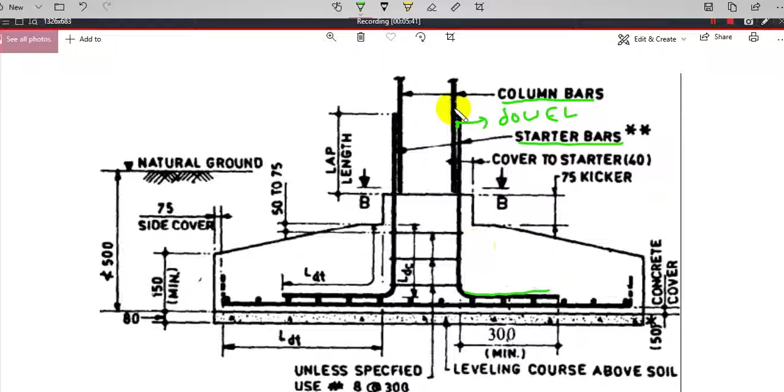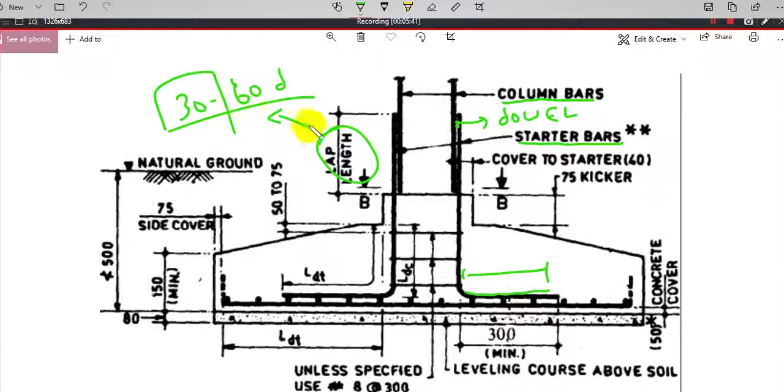First, you will be having a column bar which stays right inside of the dowel bar, or they call it the starter bar. That's used to attach the column bar right into the footing, a sort of attachment from column to footing. The length of the dowel bar could be either 300, and the height of the dowel bar comes to be the development lap length, that could be either 30 to 60 times the diameter. In this video, I'll be taking it up as 30D. There's nothing more to explain, and you can see that the column bar stays right inside of the dowel bar. Alright, so let's get into here.

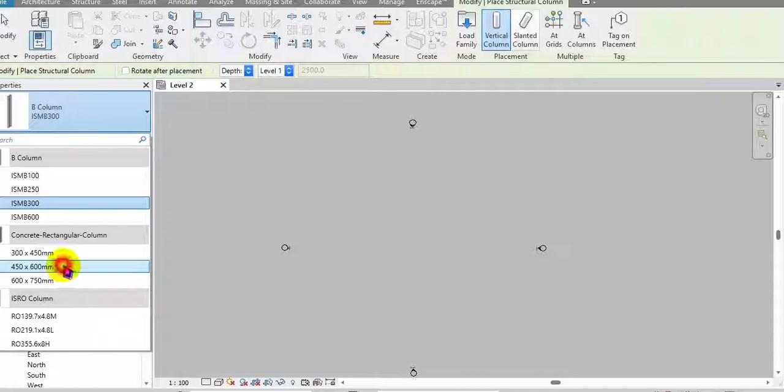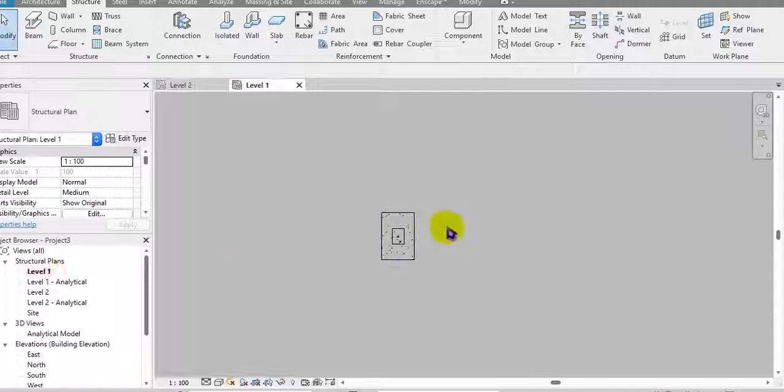So right now the foundation will not be visible in level 2, so let's get into level 1 to see that. Alright, so let's first fix up the longitudinal bar and the transverse bar right into this footing.

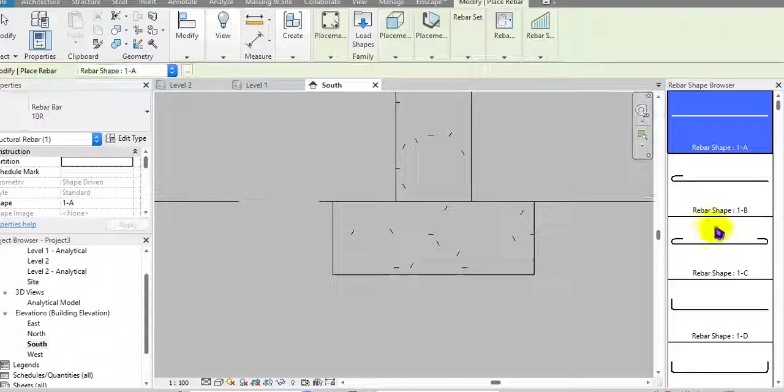So get into south elevation. We'll be placing a longitudinal bar right into the footing here, so rebar. Okay, I placed it right here, and I like to consider the spacing to be like 150, in one direction. And now I'm in south elevation, so you can see the bar goes in this direction longitudinally.

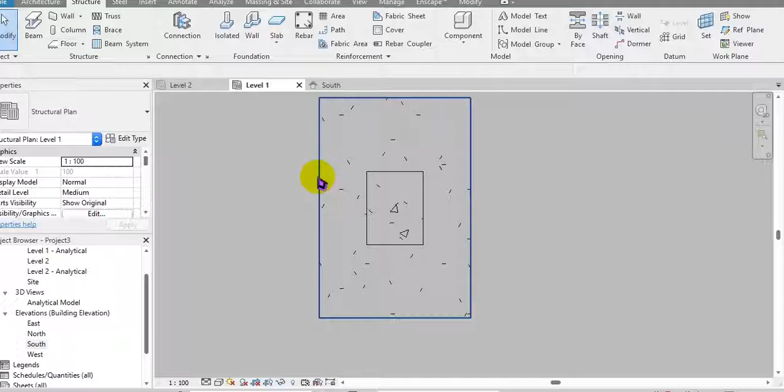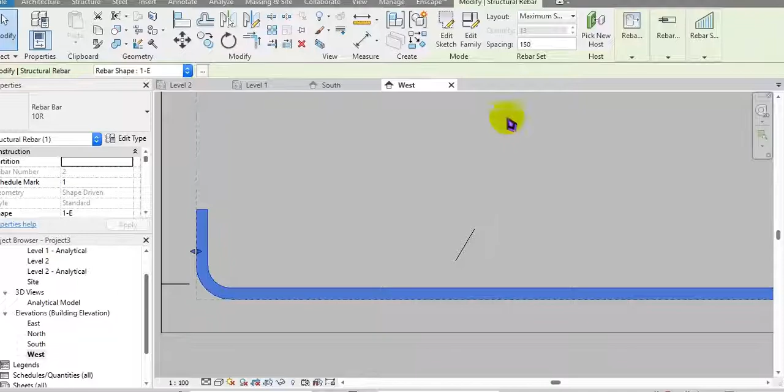So in order to place a rebar transverse, get into west elevation or east elevation, do the same thing, rebar. Okay, I'll pick up the rebar set, change up the number, it goes 150. So that's all about the case for placing up the rebar right into the basement here.

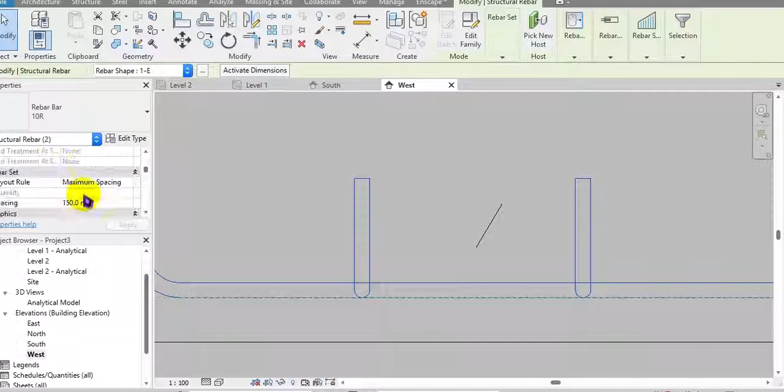So now let's do one more thing, I will show you a simple mistake that everyone will make. Right now, this point, I should just be selecting the rebar, and I like to, alright, if I get into the 3D view. Alright, this is the situation right here.

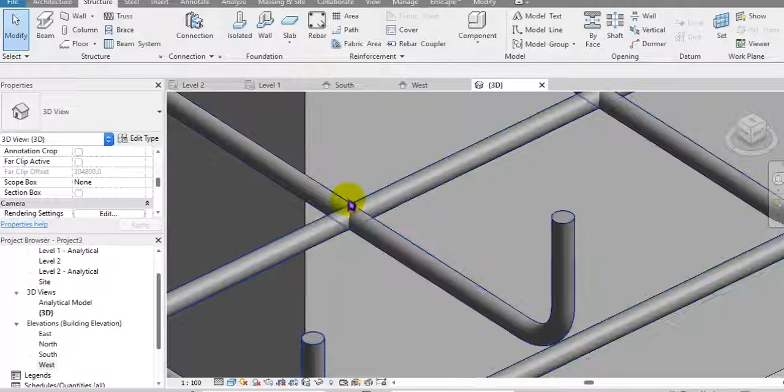As the first point of error, the mistake you can see here is two bars are intersecting right at the same point here. And also, if I turn them into a shaded view, you can see that the bar is again intersecting, overlapping right at this point.

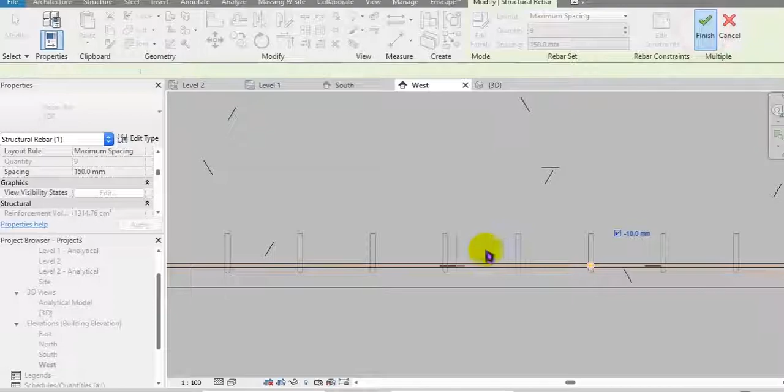So in order to fix both of these issues, let's make use of constraint. I'll select the bar right here. I can use the edit constraint options, and I like to shift the bottom bar right at 10 millimeter upwards as Y. You can see that the diameter of the bar is 10. So right now, if I get into 3D view, there's no sort of overlapping right there, but this situation has not been resolved.

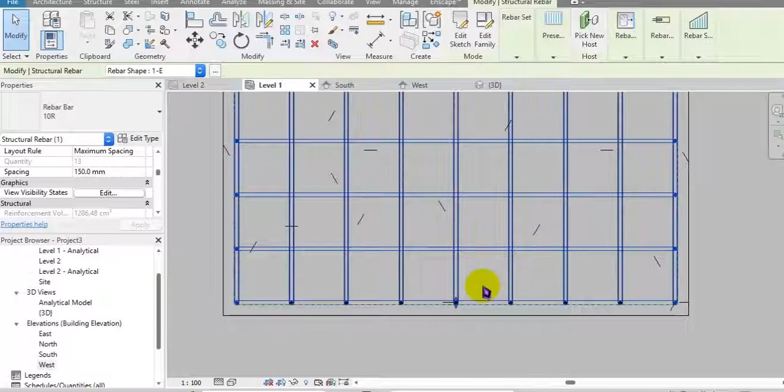In order to solve that situation, I can get into wireframe view. You can see that this part, you could like to shift the first rebar right 10 millimeter away from the face, so -10. And also the same situation right here, picking up this bar again -10. So that's it.

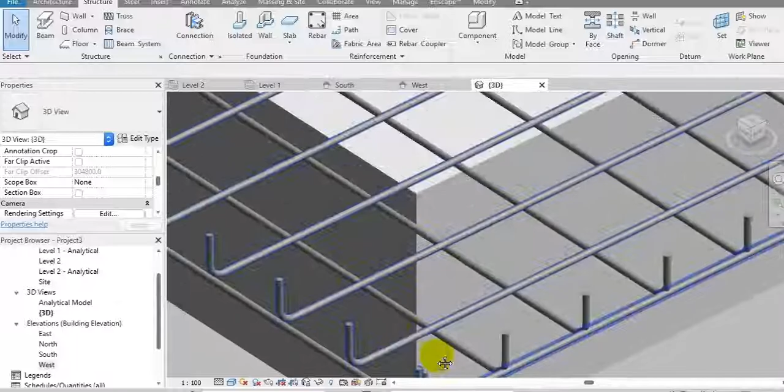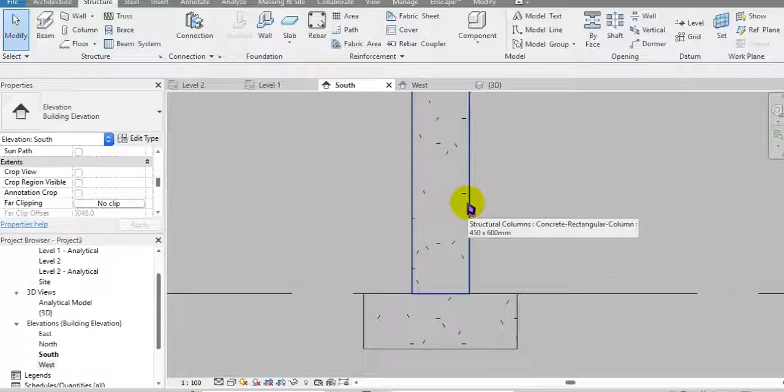Alright, cool, so that's all about the rebar provided right here. Also, let's try to provide the rebar, the column bar right there. Alright, that's all about the rebar provided in footing. Now let's provide the rebar right in the, where is it?

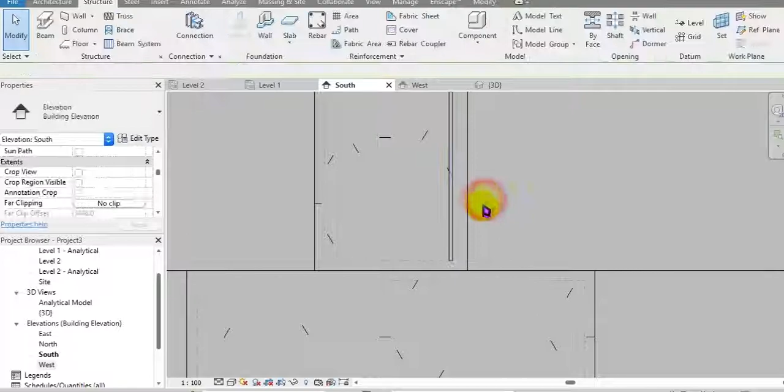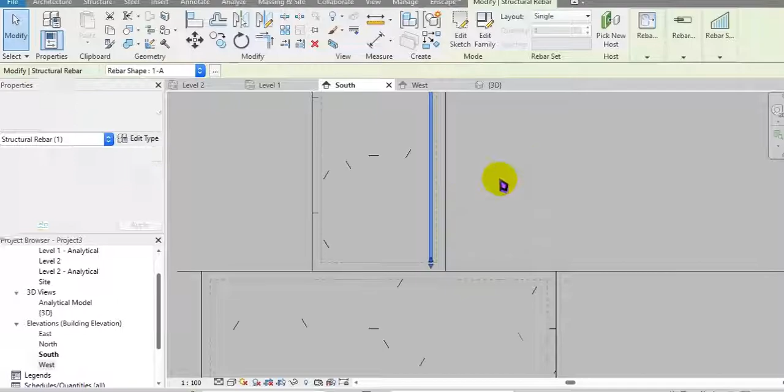Now let's place the dowel bar. Later, let's try to add something on the column bar and fix up the spacing there. Alright, in order to fix up the dowel bar, let's select the rebar now, and I can create a similar bar. And well, parallel, okay, that's okay.

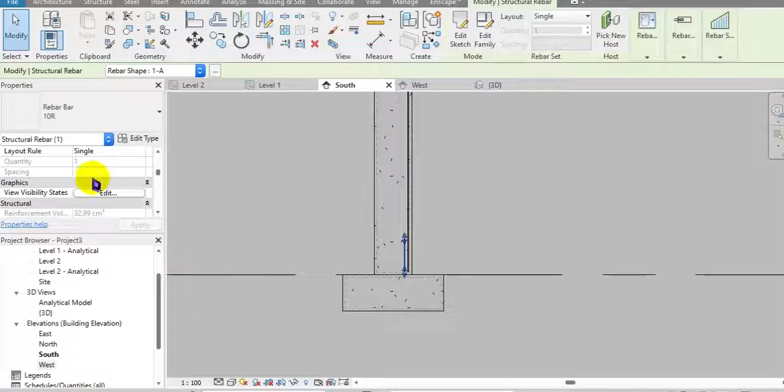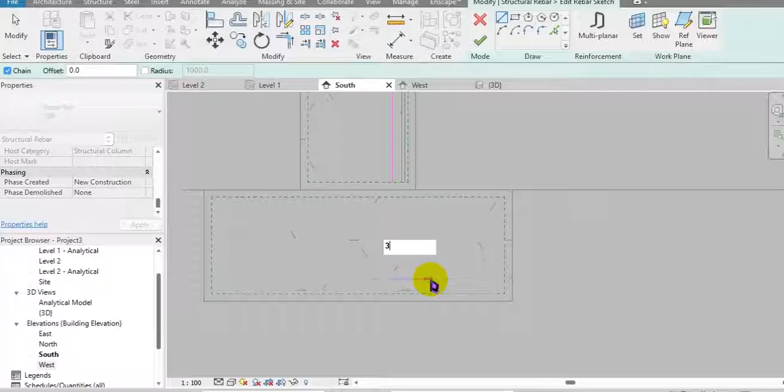Now I don't need this much height, and I'll change up the length. Alright, then I like to edit the sketch. You should see that the bar stays at 300 millimeter right inside of this column. So let's try to draw that. Okay, right from here that goes 300. That's it, kind of trim.

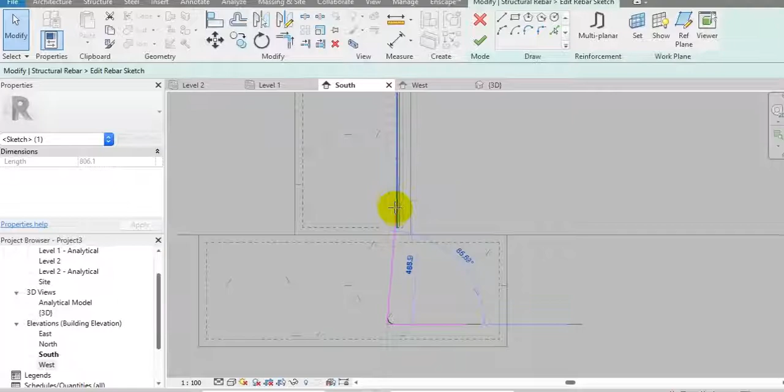First and second. About the height of the rebar, it's 30 times the diameter, so that will be 300. Well, 300 is measured from the face, so let's try to keep it right onto the face. Then let's apply a formula. I'll just add 300 with 360. That comes to be 660. That's it.

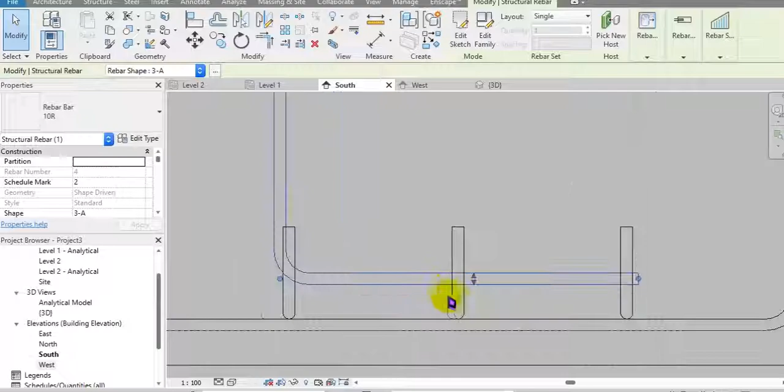Now let's fix up the distance from each face. Okay, let's get into wireframe. So we got 10 millimeter here and 10 millimeter here. So the total constraint provided right into this will be -20. Alright, that's it. Now what about the face? Okay, and to the face you can see that the column bar stays right inside of the dowel bar, so the cover will be the dowel bar, so that will be right away 0. It stays inside. Alright, that's cool.

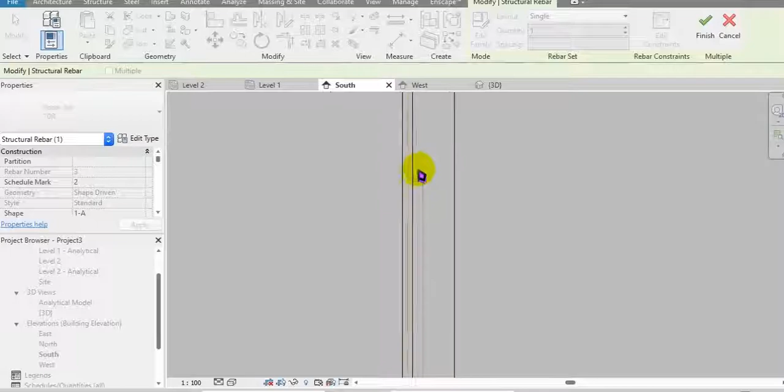Now what about here? Edit the constraint. That'll be -10, okay, as the diameter of this dowel bar is 10 millimeter. Alright, so fixing the dowel bar right into the column bar is also clear.

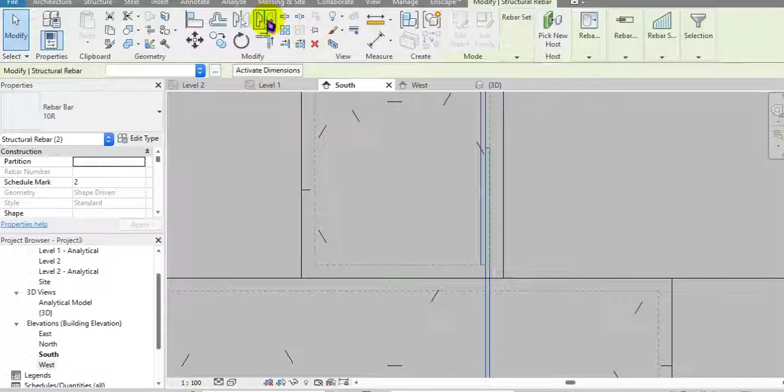That's it. Now let's try to change up the number. Fix number 3. What about here? Fix number 3. Alright, then mirror. Oh wow, that's it, I'm getting the 3D view. What, can you see anything? Okay, getting the wireframe. Alright, that looks so cool.

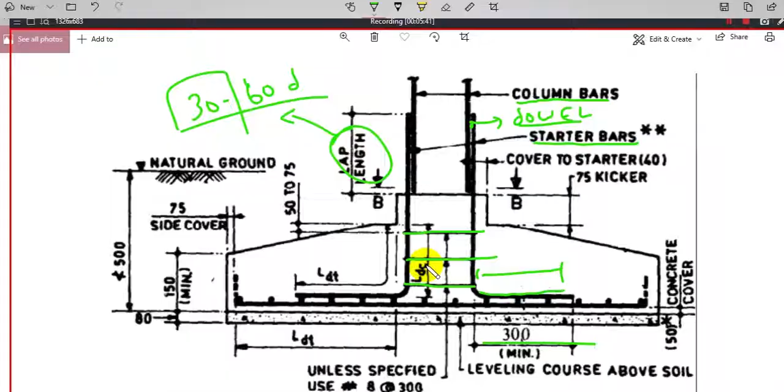Now, next thing, anything missing? Yeah, we will be having a sort of tie or stirrups right there. I'm gonna provide a spacing, Ldt. I'm gonna give a spacing of 300 millimeter of stirrups right in here. So get into level 1 or level 2. Alright, rebar, I'll pick up a kind of stirrup right there. Okay, that's cool.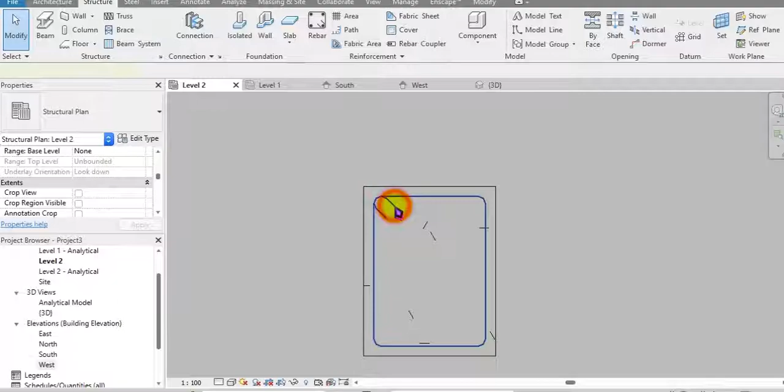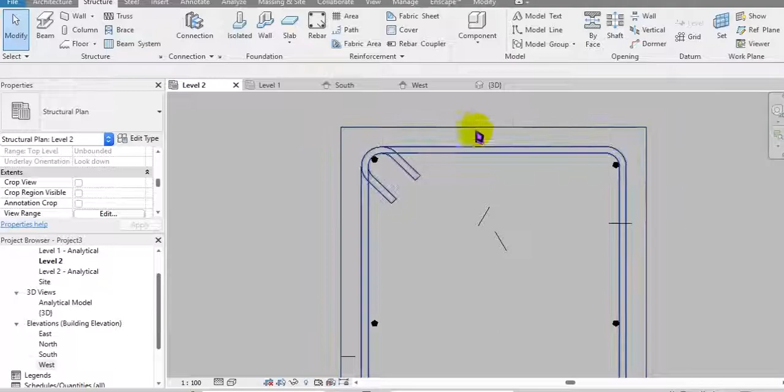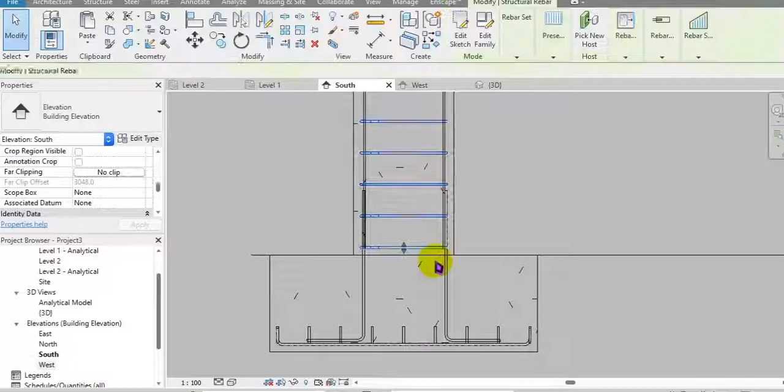I can see if the dowel bar exists right in here. Also, one more thing, it will stop right into the face of the column. You can drag it up and make sure that it's right up until the face of the asset here. Okay, so that's how you'll be picking up a rebar right into the footing.

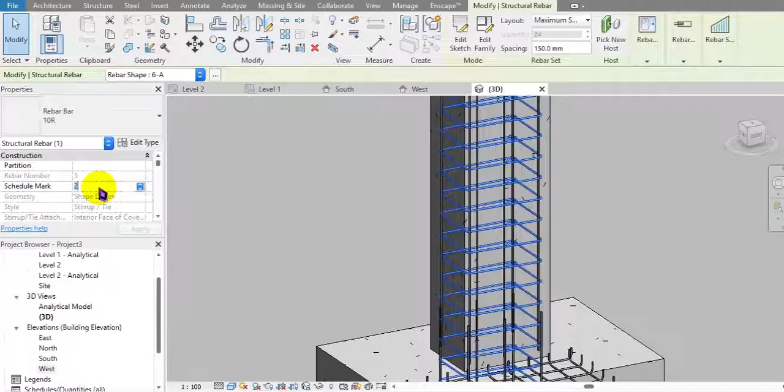Now let's try to do one more thing, get into the visibility graphics, or just before that get into 3D view. I like to tag up everything. Schedule. That one is ties. Okay, and I got maybe this one could be the longitudinal bar, footing longitudinal bar.

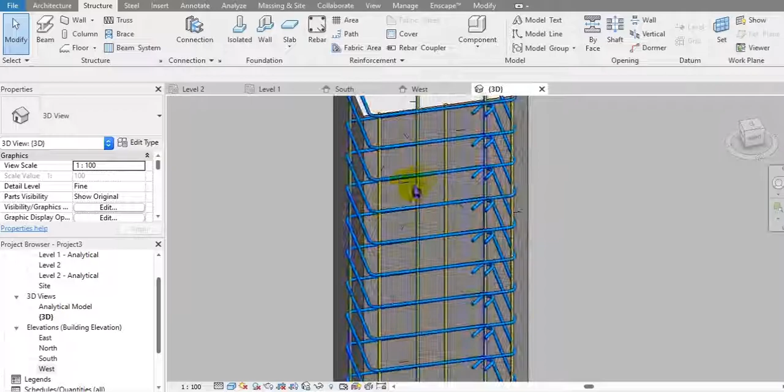As you can see that the colors are being changed. For the longitudinal bar it's yellow, and for the ties it's blue, and for the dowel bar it's kind of orange. And just like that, you can apply all the clutter right into there. So well, that's it, you can place it right into the sheet, I don't care.